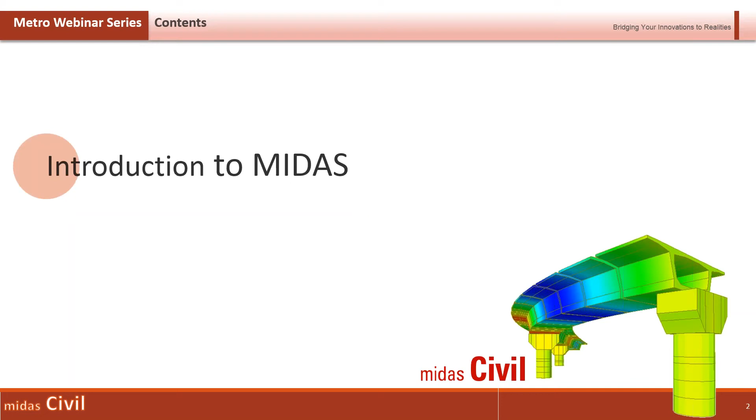Good morning everyone. My name is Tanmay Agarwal, and on behalf of MIDAS IT, I welcome you to this webinar. In today's session, we will be covering a brief introduction to MIDAS and its engineering solutions, and rail structure interaction for metro bridges. We'll look at the main concerns and considerations for rail structure interaction, and then I will generate a model in MIDAS Civil to show you how easily and effectively it can be done.

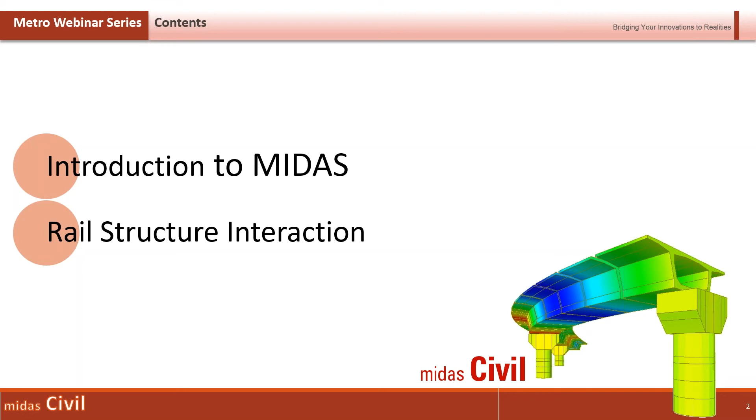So to start with, a brief introduction to MIDAS. MIDAS IT is one of the leading CAE software development and engineering solution providing companies in the world. By engineering solution, what we mean is that we provide a strong combination of sound engineering tools in all sectors of civil engineering - bridges, buildings, geotechnical, as well as mechanical engineering - along with very sound technical support and services.

Talking about the areas of civil engineering that MIDAS covers, for bridge engineering we have a specialized solution, MIDAS Civil. For more profound and in-depth finite element analysis, we have MIDAS FEA. Similarly, we have MIDAS Gen as the prime software for integrated design system for buildings, and MIDAS Design Plus as a specialized design tool. MIDAS GTS NX is a specialized software for geotechnical solutions like foundations, slope stability, tunneling, and soil dynamics. We also have SoilWorks, which is a two-dimensional solution for analysis and design of all geotechnical problems.

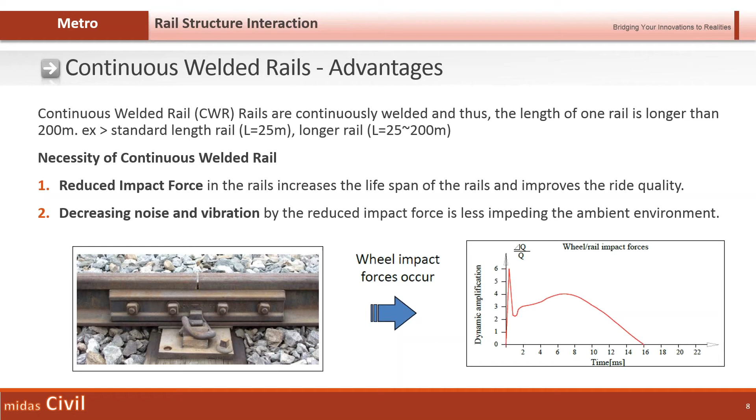Now metro transportation systems use continuous welded rails. Why? Mainly because it helps in reducing the impact force, which ultimately leads to better ride quality at high speeds. And not only metro projects - even the DFCC project, the dedicated freight corridor - those projects also use continuous welded rails. Now, what are the key concerns while using continuous welded rails?

Since the rails are continuously welded, high amounts of stresses develop at the joints for the cases of temperature rise and temperature fall, and this is because no movement is allowed. Because of these stresses, failure of the rails may occur - for the case of temperature rise, buckling, and for the case of temperature drop, split webs.

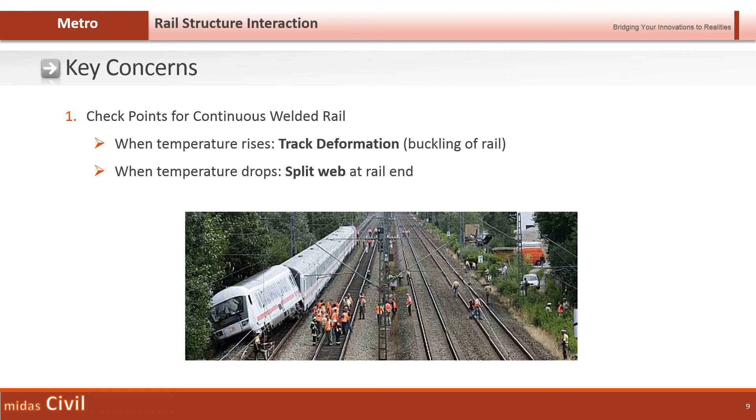Now the key considerations for rail track analysis. First of all, it is very important to simulate the interaction between rail and deck, and for this purpose, MIDAS Civil has multilinear elastic links.

Second, the consideration of all the loads - namely, if we consider the horizontal loads, the loads due to temperature and the braking and acceleration of the train. Apart from that, the vertical loads due to train. The third is the load combinations.

Now basically when we are going for analysis, there are two types of analysis that can be done here - either separate analysis or complete analysis. I'll talk about this later in the presentation.

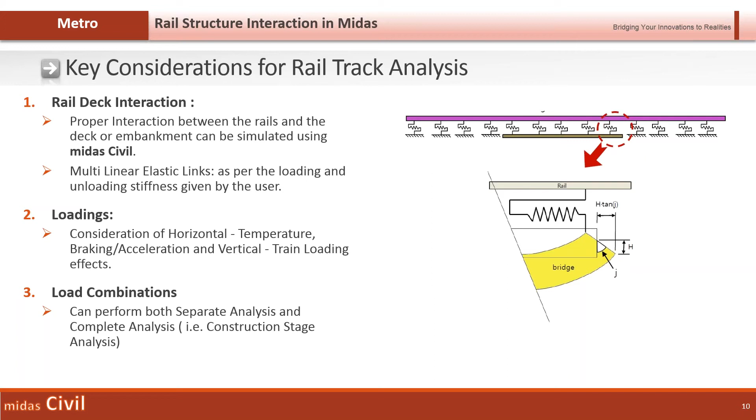Apart from this, MIDAS Civil has UIC code implemented, and the sections for the rails are pre-fed in the software. For the expansion joints, in case the stresses and displacements are very high, then we need to provide zero lateral resistance or the rail expansion joint members, and that can be done in MIDAS Civil.

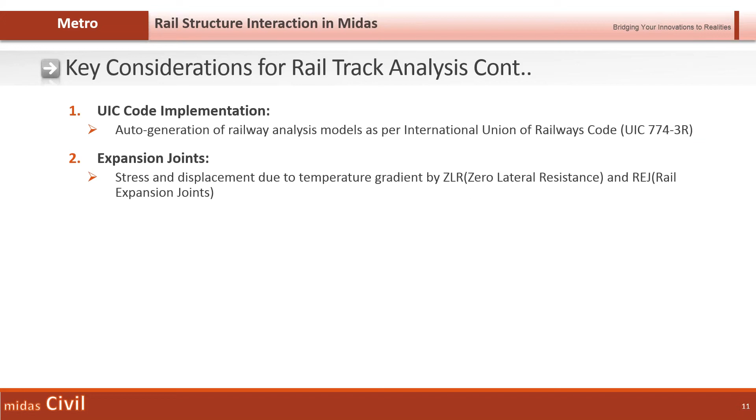Now the continuously welded rail on the bridge is connected to the superstructure by the ballast, and thus the bridge and the track interact due to loading. When thermal loading is applied, expansion or contraction occurs in the bridge and the rail. Now since the rail is supported by a fastener, cross-tie, and ballast, expansion and contraction is restrained, and accordingly axial force and axial stresses are accumulated in the rail.

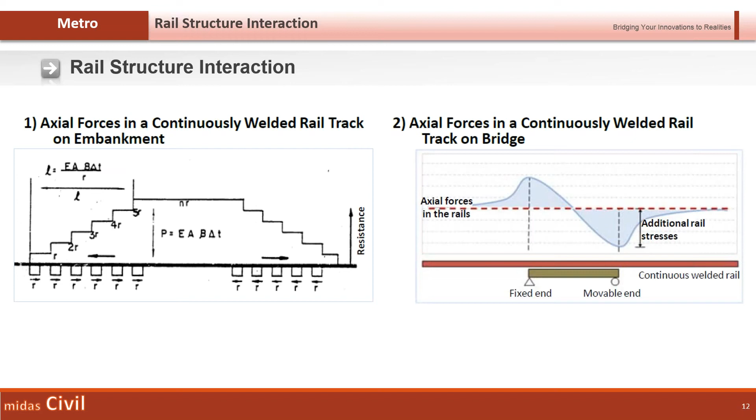So as I was telling you about the two analysis methods, the separate analysis and the complete analysis. For the separate analysis, the thermal loading and the loading due to train are separately considered, while for the complete analysis, the loads are concurrently applied.

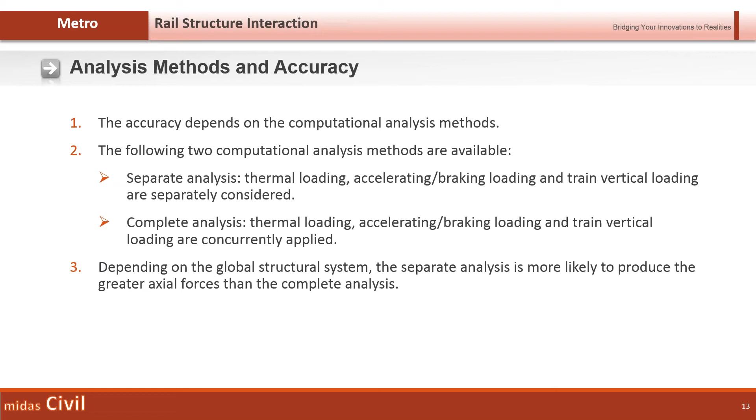While if we go for complete analysis, after the consideration of thermal loads, the application of the train loads will start from that position. So the stresses and displacement which undergoes in the rails after the thermal loads, from that position the loading of the train will start.

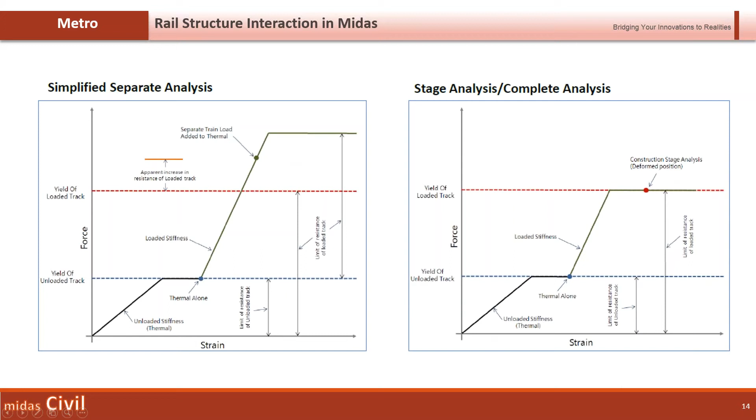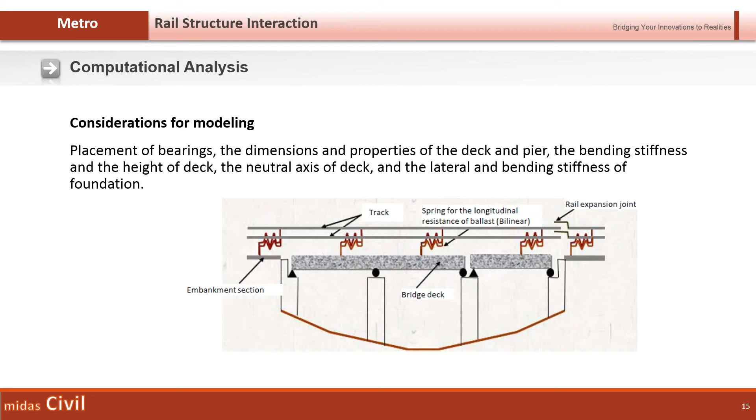So for the computational analysis, what are the key considerations for modeling? First of all, we need to properly model the multilinear elastic links, that is the interaction between rail and deck. That is a tedious job because we need to see which part of the deck is loaded, and accordingly place the links as per the loaded stiffness, and for the rest of the track place the multilinear elastic links as per the unloaded stiffness. So a considerable amount of effort is required for modeling, providing unloading and loading stiffness, and it changes with the loading position of the train.

Apart from that, the complete modeling of all the spans for various positions of the train. So if we go for manual modeling, it takes up a lot of time.

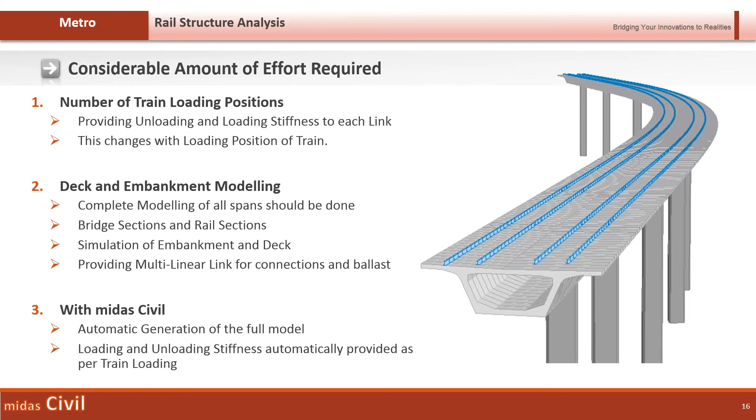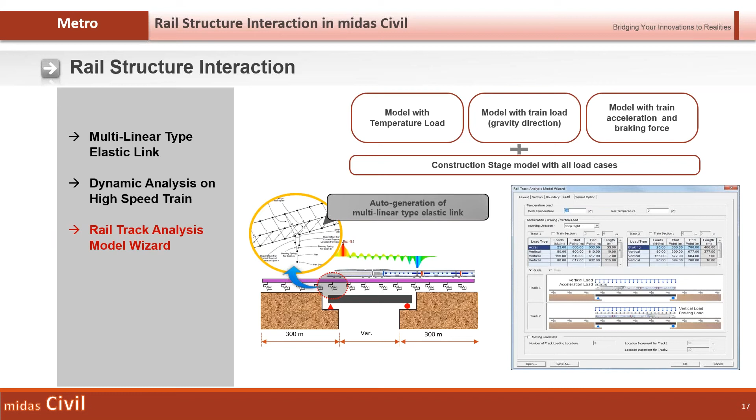Now, how does MIDAS Civil help in this case? Using the rail track analysis model wizard, all models can be generated within minutes with each and every load. Now I'll take you to the live demo of the software.

Alright, so this is the working window of MIDAS Civil. First of all, we'll see that the initial temperature that we have defined here is 0 degrees Celsius. Now, the rail track analysis wizard.

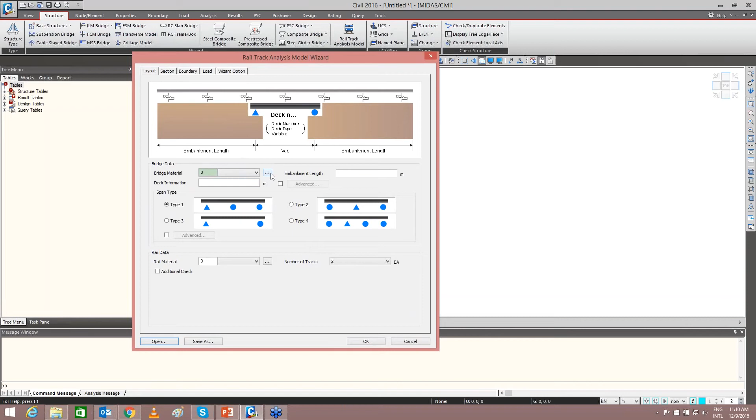Basically in this wizard, all the images guide you to enter the corresponding information which will help you to generate the model. So first of all, we need to define the material for our bridge and rail, as well as the sections. So I'll define some materials.

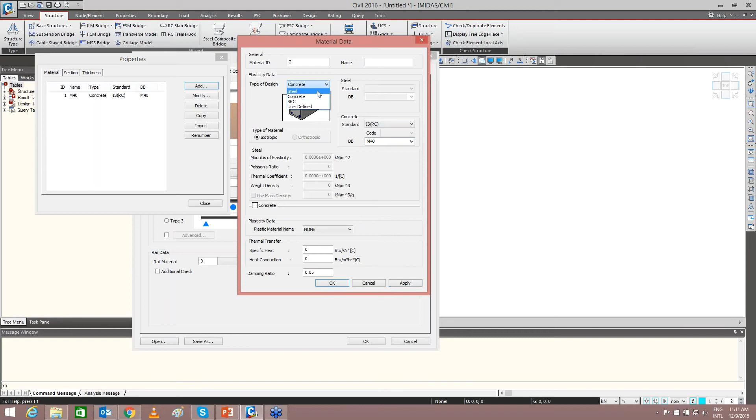The material for my bridge deck will be concrete as per the Indian standards. Consider M40 grade. Apply. For the rail, I'll consider steel as per the Indian standard.

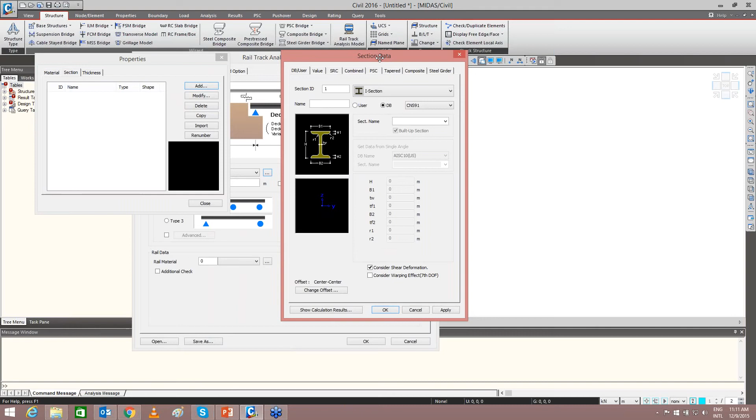Okay, next I'll define the section for my deck. So while defining the section, if we are considering metro bridges, they are mostly single cell PSC box girder. So I'll define a section. Using this PSC viewer, you can easily generate the section. This is a dummy section that I'm taking. As soon as I enter the values here, you'll see the section is generated here. And for the shear check, web thickness and torsion, these properties can be calculated automatically by the software.

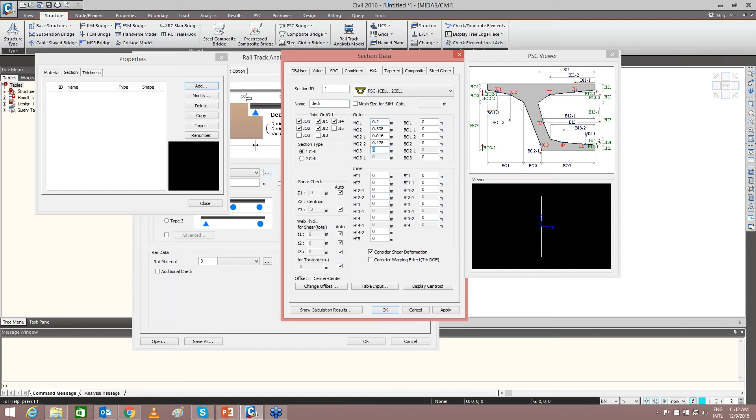I'll save this model in this folder. And after we have generated the models, we'll see that the multiple models for various train loads will be generated automatically in this folder.

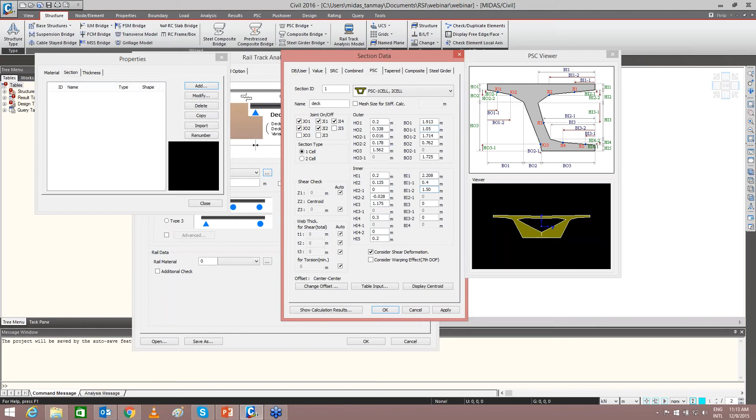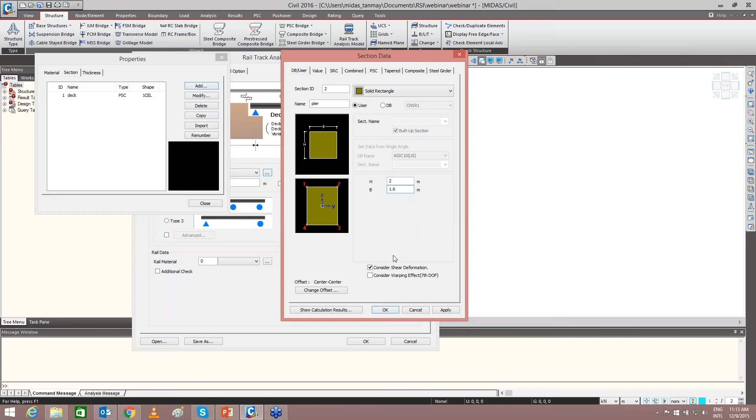Okay, so our section is generated. I'll just change the offset to center top. I'll also define one more section for my pier. So consider a solid rectangular pier, user defined. Okay, so I've defined the sections for my bridge and for my pier. Apart from that, I've defined the materials.

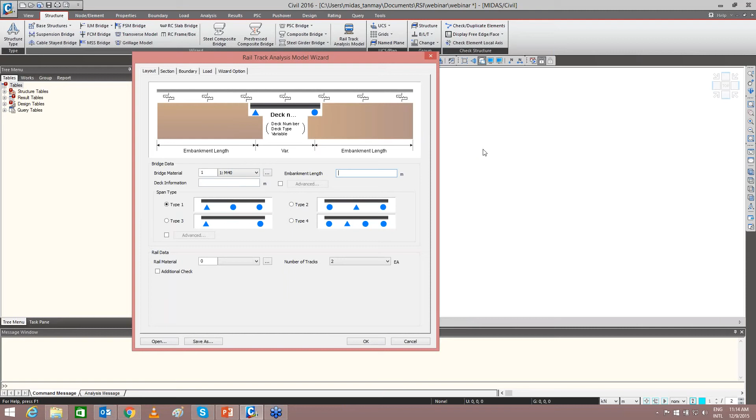Now I'll enter the values in the wizard. Bridge material M40 grade, embankment - now when we are considering metro structures, even though we don't have any embankment, we can just enter any value here, and after the model is generated, we can delete the embankment. For this case, I'll be modeling three spans of 50 meters each, and I'll consider simply supported condition. Although using this option, you can change the support condition for various spans.

For the rail material, I'll consider steel and number of tracks as 2. Using this option, additional check, you can define if there are any zero longitudinal resistance members or rail expansion joints. You can define their positions.

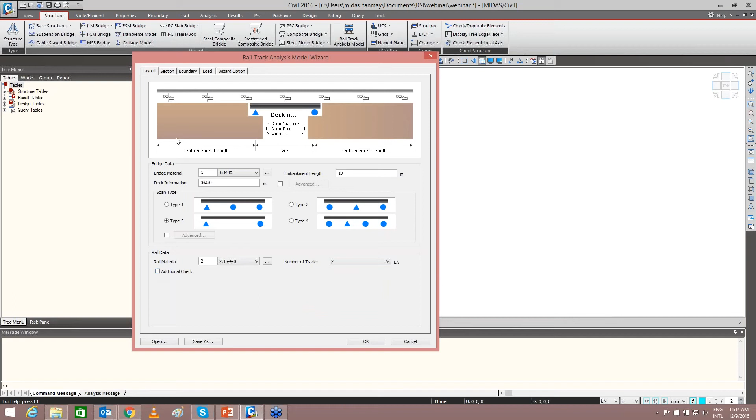Now the bridge section I've defined as deck, and the eccentricity between my rail and slab, let's say I'm considering that as 700 millimeters. As I told you, these sections are pre-fitted in MIDAS as per UIC 774-3R. So I'll just select this section and add it. Using this option, I'll define the positions of track with respect to the center line of girder.

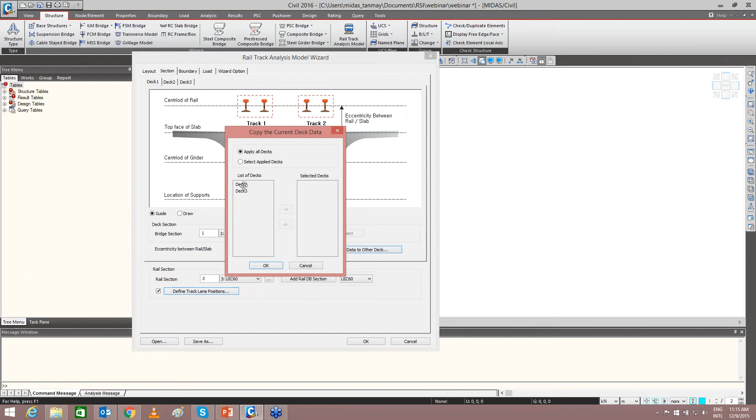Now I'll copy this information for the rest of the decks. Both decks have been selected. So as you can see, the information for all the decks is this.

Next, I'll define the boundary conditions. For the boundary conditions, I'm defining the bearing type, and let's say I'm considering the stiffness of the bearing as 5000 kN per meter and the length of elastic link as 75 millimeter.

Pier section, we have defined pier, material will be concrete, and the bottom of the pier is fixed, the height of the pier which can be altered.

Now these properties for the ballast bed or the concrete bed have been defined as per UIC 774-3R. So let's say for longitudinal displacement limit, 8 millimeter, the stiffness for unloaded condition 25, and for the loaded condition 50.

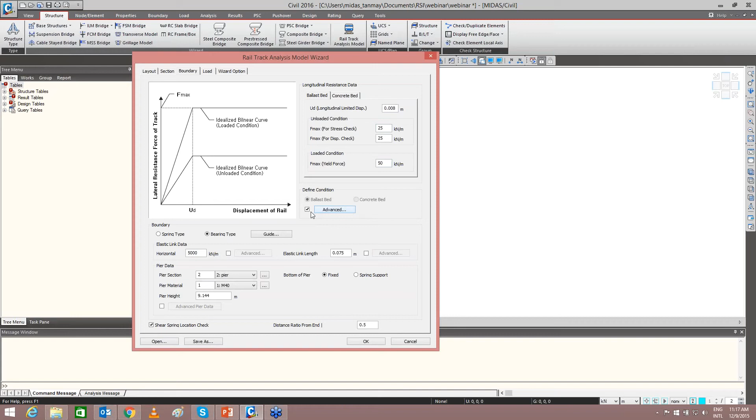Now in this case, either it's a ballast bed or a concrete bed, so you can add the properties and select whichever is the case, or using this option you can even select, let's say, if for a particular span you have ballast bed, and for the next span you have concrete bed, so even that can be done. Apart from that, this guide helps you see the boundary conditions at each and every place.

Spring type, bearing type, embankment.

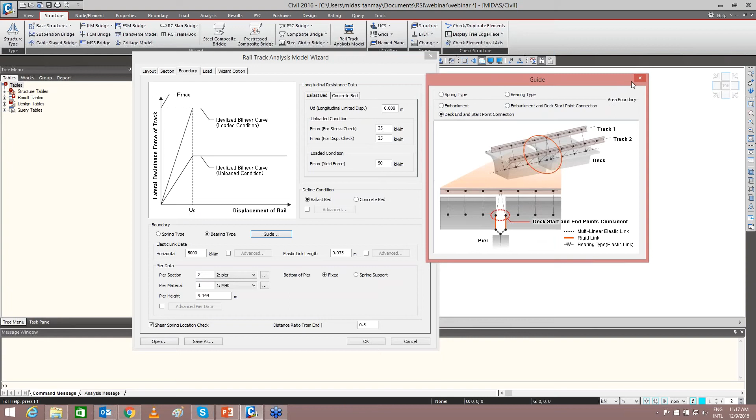Next, I'll define the loads. Let's say the deck temperature is 25 and the rail temperature is 32.

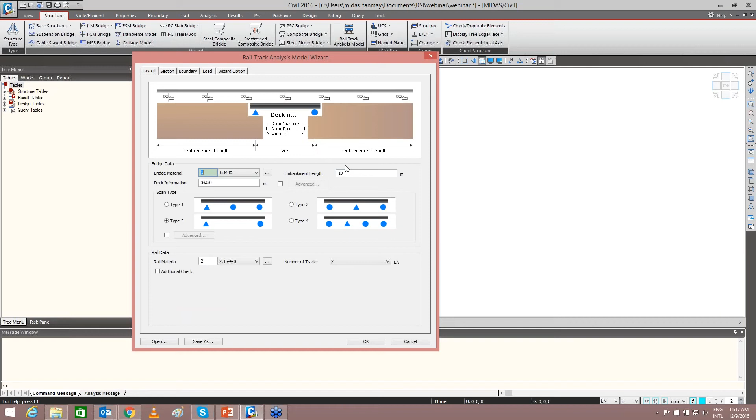140. Starting point I'll take as 10 meter, because initially, if you remember, for this case we entered 10 meter as the embankment length. So we have to consider the case when our train is on the bridge, so that is why I'll start the load from 10 meter.

This is the bogie load. Now I'll define the engine load. Let's say 120 from 40 to 60.

Now definitely when we are defining two tracks, for the worst case we will define the braking load for one track and the acceleration load for the other track. So for track 1, I'll define the braking load.

And herein you can also enter functions. Let's say if we are considering 20% of the vertical load as braking load, so I can directly enter here and it will calculate it.

So I've defined the loads for my track 1. Similarly, I'll do for track 2 - the engine load and the bogie load.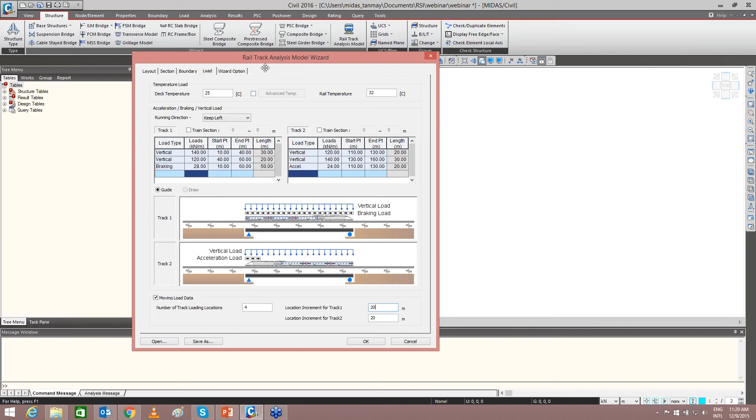Okay, I'll define the element length, and let's say if we go for complete analysis and just select OK. Okay, so the model is generated.

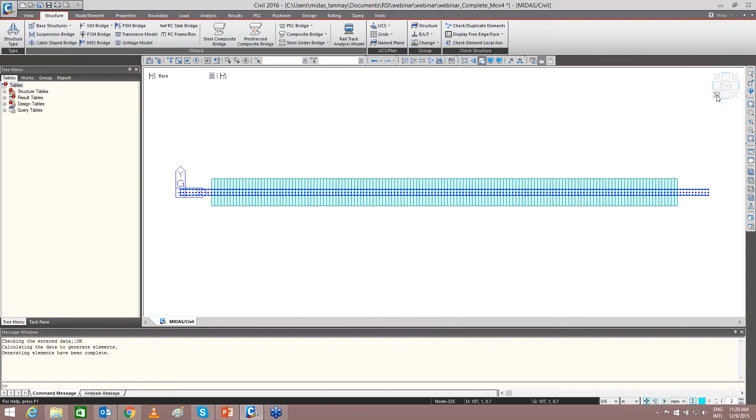And as I told you, if you see in this folder, these models have been generated automatically.

I'll show you the moving load positions for each and every model.

This is the first case that we generated, and as you can see in this case, both for the unloaded case as well as for the loaded case, the model has been generated.

And if we see the unloaded case, only the temperature load will be there, and for the loaded case we'll have the temperature load as well as the acceleration and braking load and the vertical load. So this is the position that we defined for the first case for track 1 and track 2.

Now if we see the next model that is generated, wherein we have to do an increment of 20 meters from the first case, an increment of 20 meters in the train position has been done.

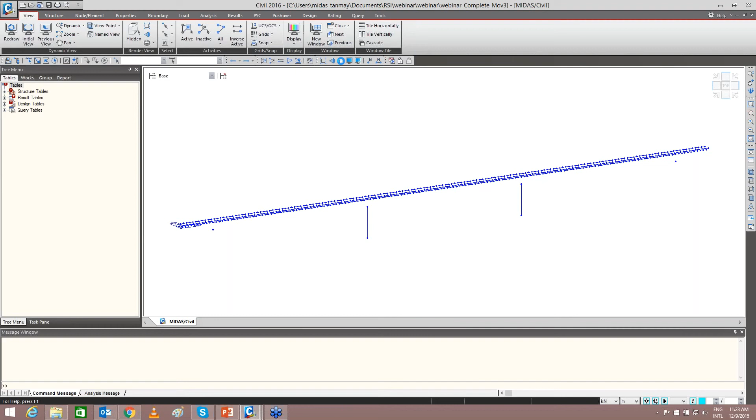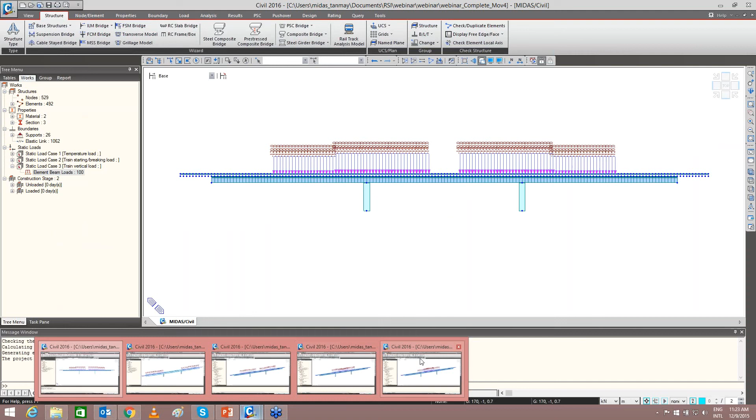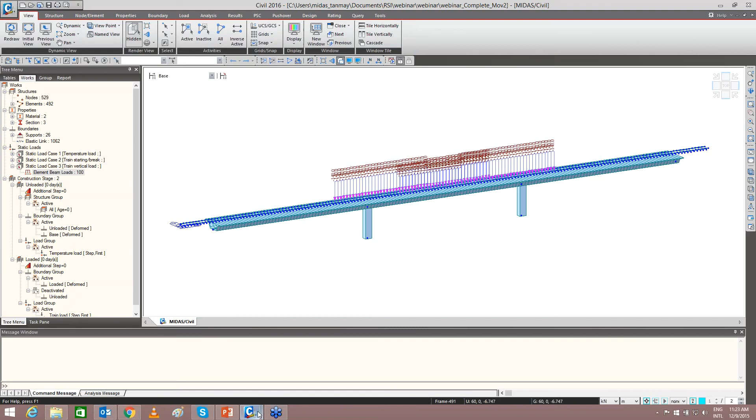Again an increment of 20 meters, and the last model is this one. So a total of 5 models have been generated. We defined the first model, wherein the position of the loading on track 1 and track 2 were defined here, and in the subsequent models an increment in both the positions of 20 meters has been applied. The second case, third case, fourth case, fifth case.

So in this way multiple models have been generated very quickly by using the wizard. This model is ready for analysis. I'll just show you the multilinear elastic links that have been created automatically.

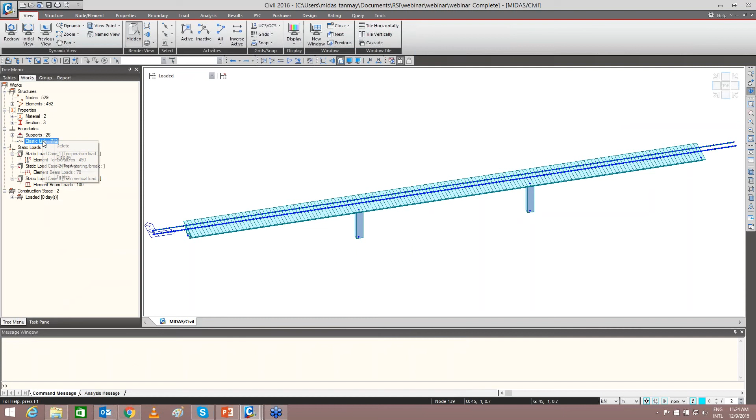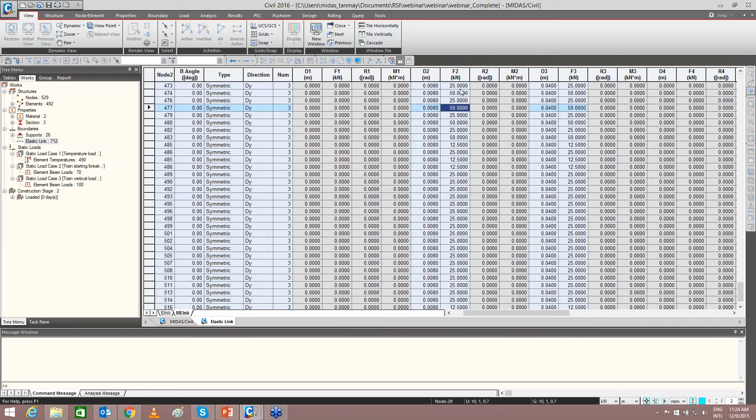So when we see here, all the links have been generated, and if we want to see the stiffness of these links, on what basis they have been created, whether a loaded or unloaded condition, we can just go to tables and as per the node numbers the stiffness will be displayed here. For the unloaded condition we gave the stiffness as 25 and for the loaded we gave 50. That can be cross-checked from here. I'll analyze this model now.

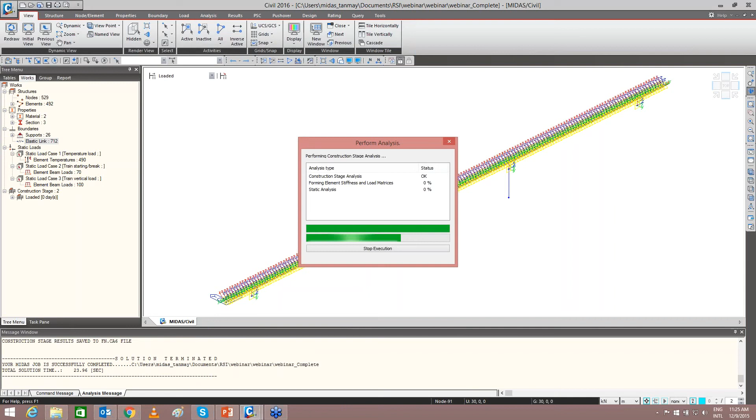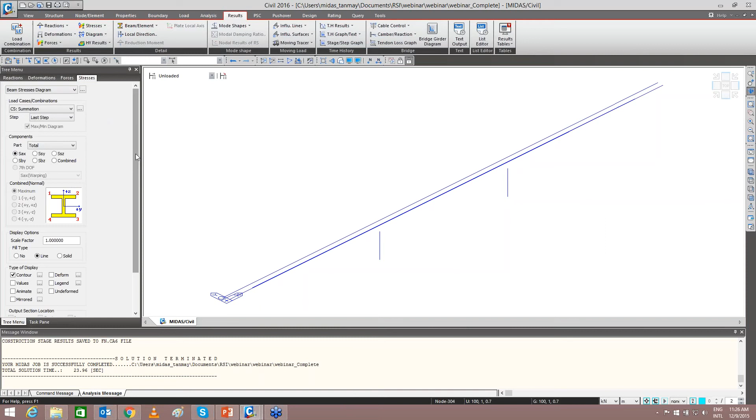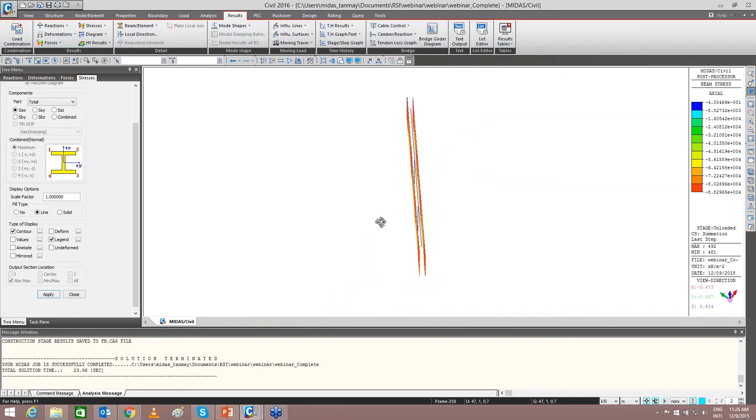The analysis is complete and now we'll see the results. I'll go to results and see the beam stress diagram. First we'll see the unloaded condition, when we are considering only the temperature loads, and we are interested in the axial stresses. Legend and apply. Since this was a case of temperature rise, we are getting compressive stresses. These are the stresses in the rails, which can be seen here.

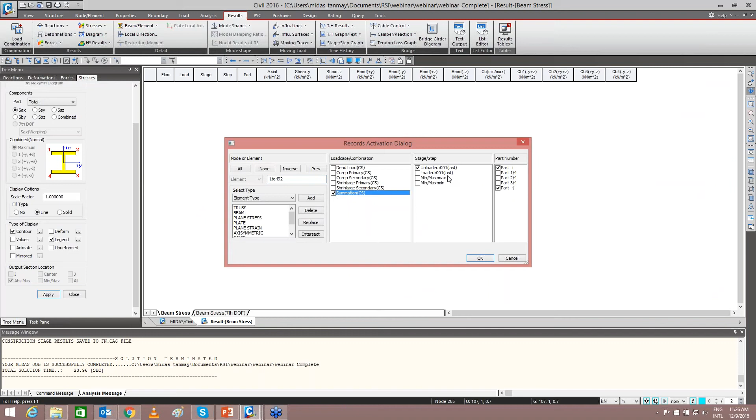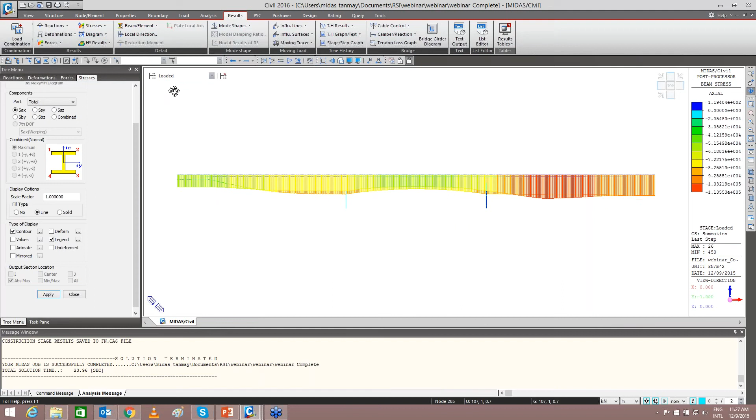Apart from that, if we want to know the value of stresses at any point, in any element, we can go to result tables and beam stress. For this summation load case, unloaded, and for all the elements of rails, we can see the axial stresses, and these can be cross-checked with the limits provided by UIC 774-3R. Similarly, for the loaded case, this is the stress profile in the rail.

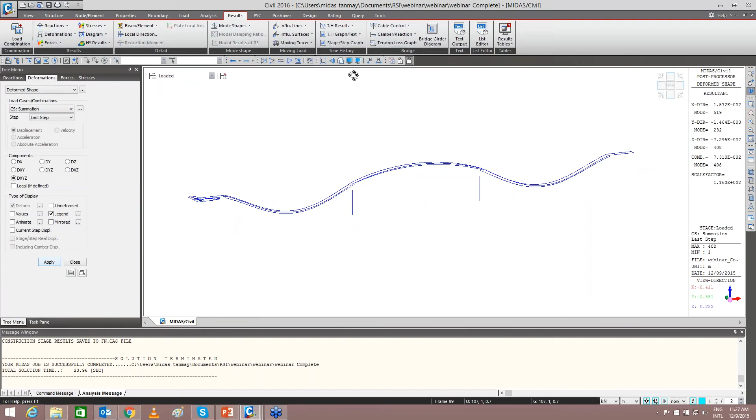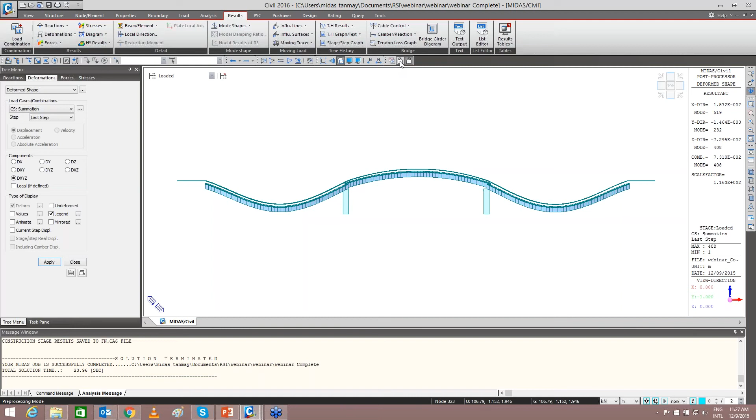Next, we are interested in the deformations that are occurring. So for that, deformed shape, let's say for the loaded case. For the first load case that we entered, this will be the deformed shape, and we are mostly interested in the relative deformation between the rail and the deck. For that, using this option we'll see the node numbers: 32, 33 and this one.

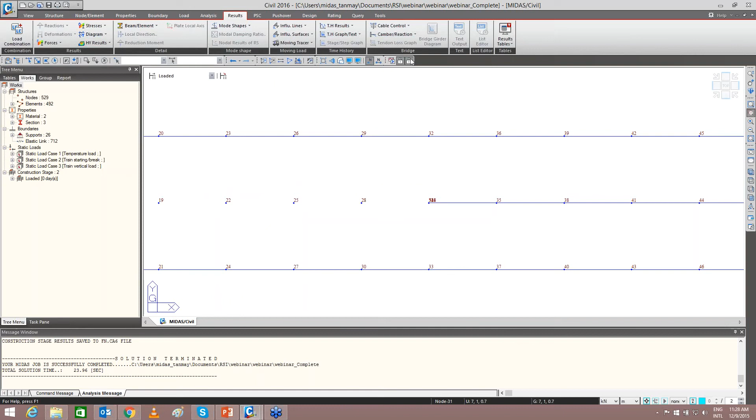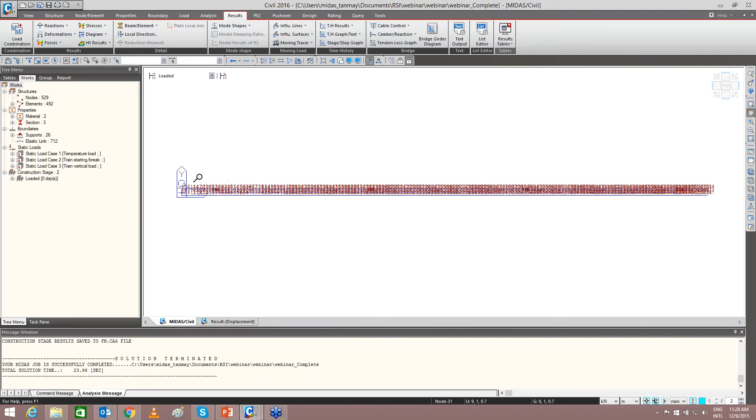Now I go to result tables, displacements, for the loaded case. Nodes 32, 33 and 34. We can go to the table and see the displacement Tx value in millimeters for 32, 33 and 34. Using these values, we can calculate the relative deformation, which can be checked with the limits provided by the UIC 774-3-R code. And for all the models generated, we can do the analysis and find out the worst case for the various positions of the load.

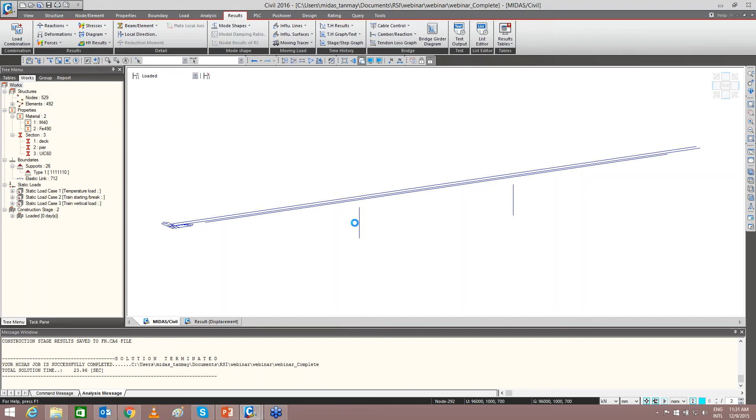Alright, so we have a query: what if the number of tracks is more than 2? Generally for metro structures the number of tracks is 2 only, but even if there are more than 2, once we have already generated this model, I can just copy the rail track one more time. Here we have entered 2 tracks, but MIDAS Civil shows a single line, the center line for both tracks. So if I have one more track, I can copy this and enter it here.

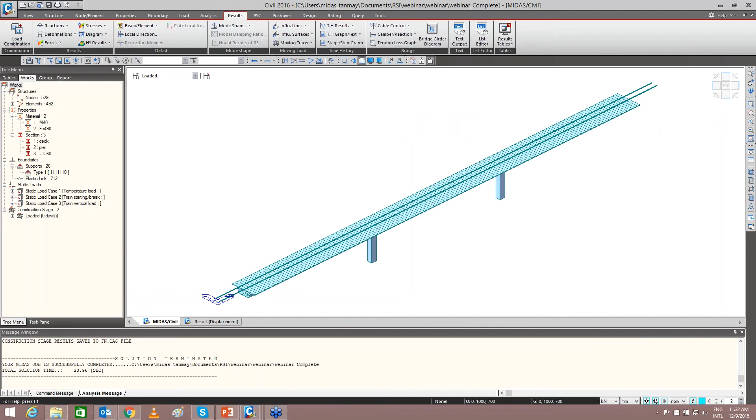The applications wherein MIDAS Civil has been used. So for the Chennai Metro, L&T used MIDAS Civil for rail structure interaction analysis, and even for Hyderabad Metro.

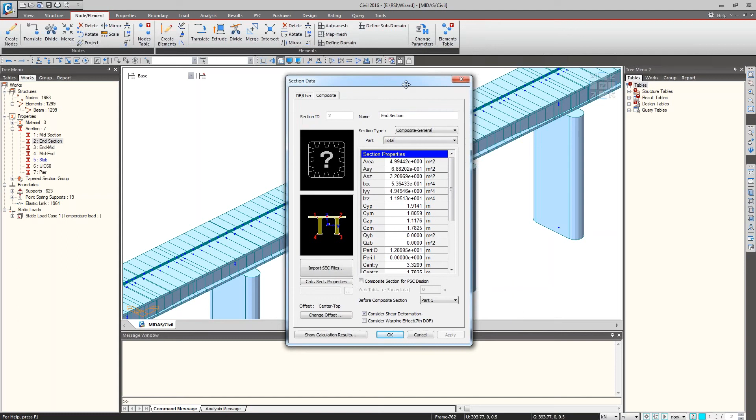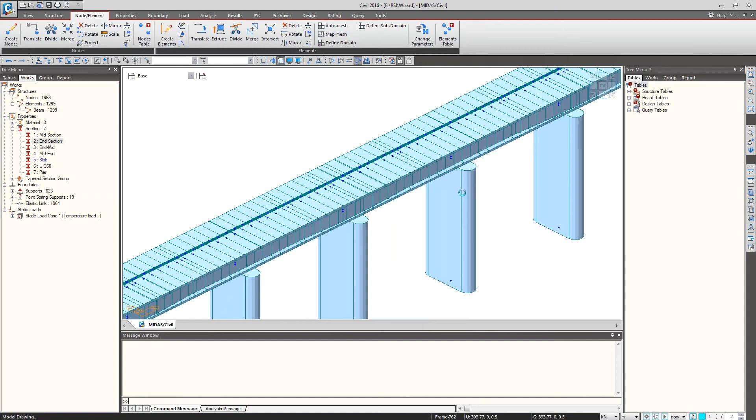So again, people ask us what is the applicability and how it can be compared with the actual grillage model, wherein the behavior is different for different girders. So this has been compared with the actual grillage model, because here, if you see, this is just a line model connected to the rails. So actually in a grillage model, the individual position of the rail will be connected and the axial deformations will be transferred differently to different girders.

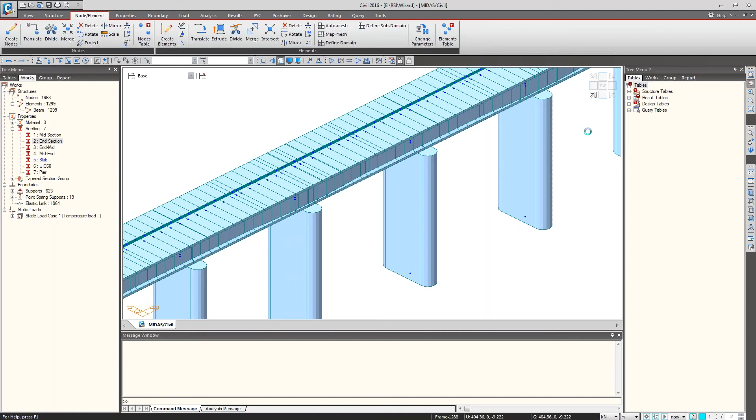So the overall results have been compared with the grillage model, and they have come a little bit different, but for ease, because RSI is quite a complex analysis involving long welded rails, we need to create very tedious models. So for that case, one can do it this way. And since this has been compared, we can send you the comparison of this with the grillage model.

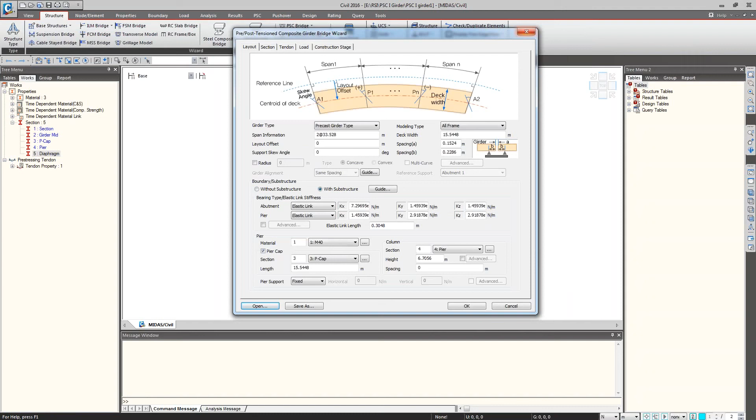So again, I would like to show you one more feature which has been recently introduced in the 2016 version for modeling the girder and slab type grillage model. So this is the wizard which has been recently introduced in MIDAS Civil to ease modeling of a grillage model. So a PSC composite grillage model can be generated easily. So I will just show you what input we are taking for that.

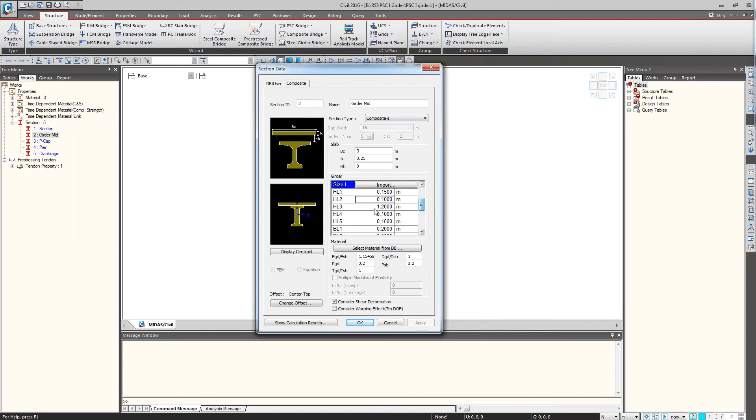We are just taking a composite girder wherein the material definition for girder and slab has been done, as well as the cross-sectional definition for the effective width of girder, and the overall girder dimensions have been entered over here. Also the material properties for girder and slab I am taking over here, and also the time dependent properties, the creep and shrinkage property for girder as per IRC 112.

So we have defined the time dependent properties for the girder and slab, the creep and shrinkage properties as well as the compressive strength properties. I would like to tell you that in RSI also we can include the time dependent properties of the longitudinal section. For the superstructure, we can include the time dependent properties and those will be considered.

But again, we'll have to define one more additional stage for long term effects. We'll need to define the number of days as some 100 years, so that we can consider the long term effects also in RSI analysis.

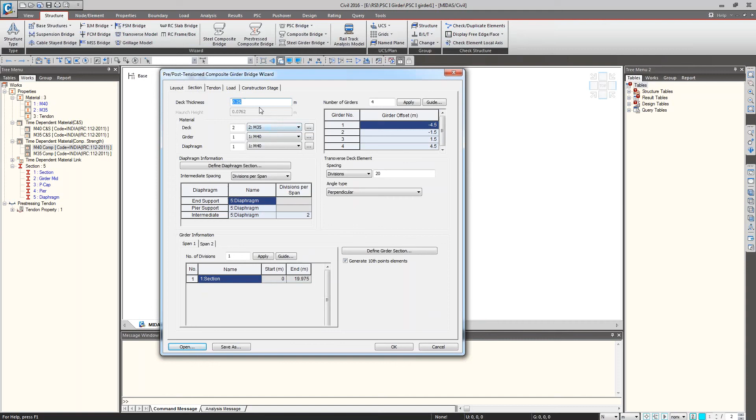And then the various materials for pier cap and pier can be defined. The height of pier can be defined over here. And then moving to the cross-sectional definition, the thickness of deck slab can be defined over here, and the various material definitions for girders, deck, and diaphragm can be done from here. Also, the number of girders can be defined using this guide. So you can define a number of girders, and then the distance of the girders from the center line of the grillage needs to be entered over here.

Then transverse dummy elements will be created for the distribution of live load. So for creating transverse elements, you need to give the divisions or the spacing as per various options available over here. And then you can give multiple diaphragms along the length, and you can enter different cross sections for the diaphragms as well. And also along the length of girder, you can enter various cross sections.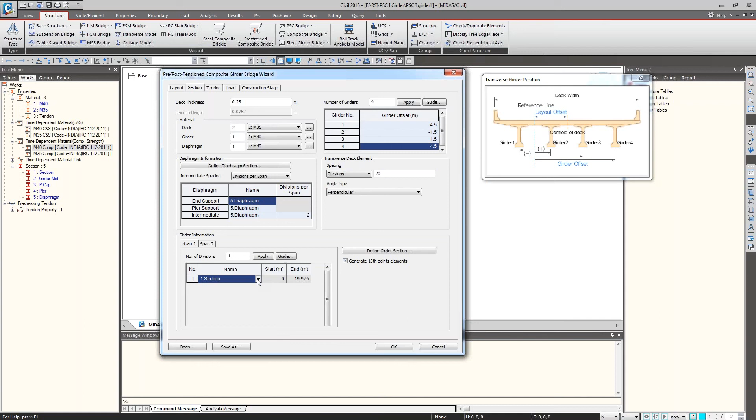Also moving on, the tendon profile also can be generated from the wizard itself. So no need of entering the tendon profiles separately. So one can enter a curved profile or a harped profile as per the guide available in this. So various definitions for profile are available. So I'm going with a curved profile for both the decks with 3 tendons for span 1 and span 2.

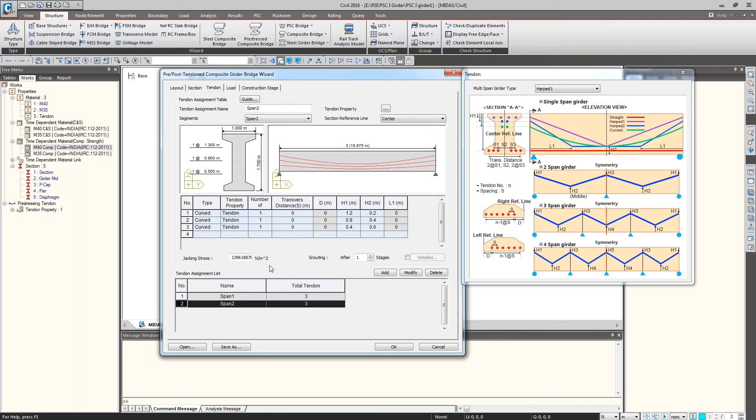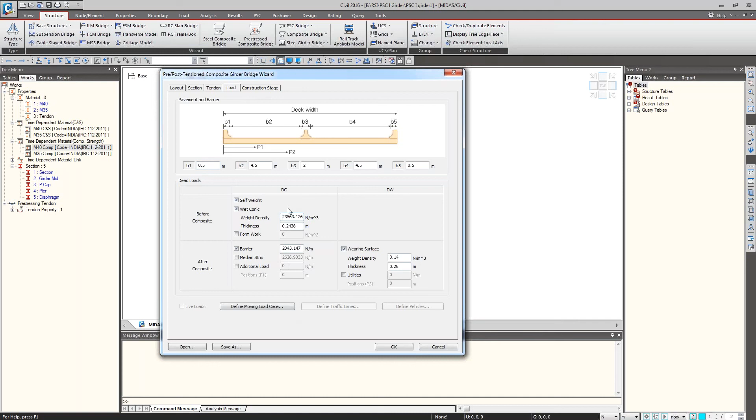And then moving on to the load application, the various loads can be applied by inputting the densities. The barrier load and the wearing course load can be applied over here by inputting the densities. And moving load, it's better to apply it after creation of the model. So this option is not valid for the grillage wizard.

So moving on to the construction stage. So this is the construction stage basically which we take. First, the girders are activated, and then the diaphragms are activated, and then over that, the wet load of the slab will be kept over the girders. So that will be with the girder property alone. And then when the girder becomes composite, that is when the slab hardens, the composite property will be considered. After that, the long-term effects and SIDL loads will be applied over the structure.

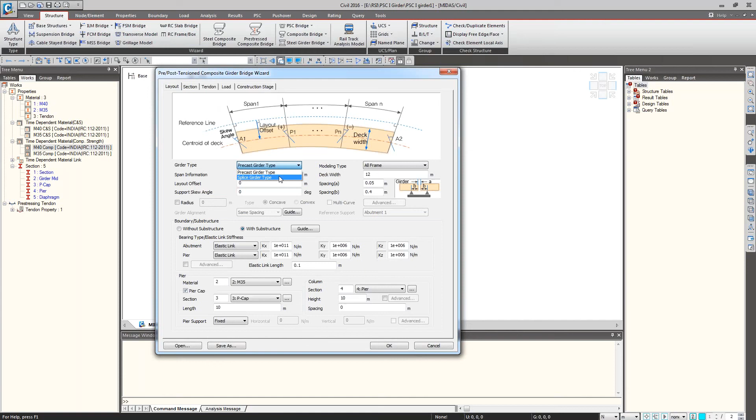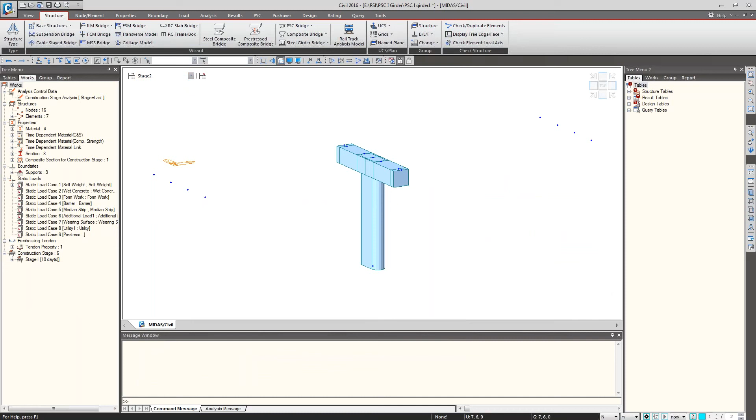So when I click on OK, you can see that within no time this model is created. And if I just show you the stage-wise model, stage 1 and stage 2 are wherein just the girders are there. In stage 3.1, if you see over here, the wet concrete load is activated over the girders. And then in stage 3.2, the slab is activated.

And then stage 4, the additional loads, barrier loads, and utility and wearing course loads. So superimposed dead loads are activated, and the fifth stage will be for long-term effects. So this is how very easily you can generate a model using the pre-stressed concrete composite bridge wizard.